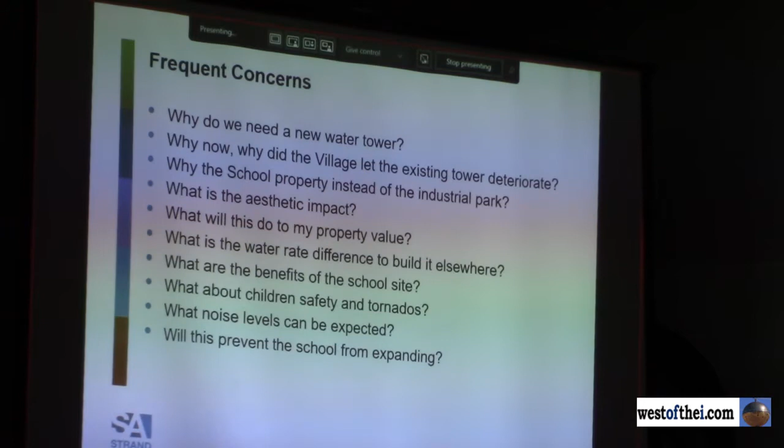First, why does the village need a new water tower? As most folks know from seeing the existing water tower, that needs repair. That's one side of it. Another side of it is that the village's water supply system needs additional fire flow capacity available to it.

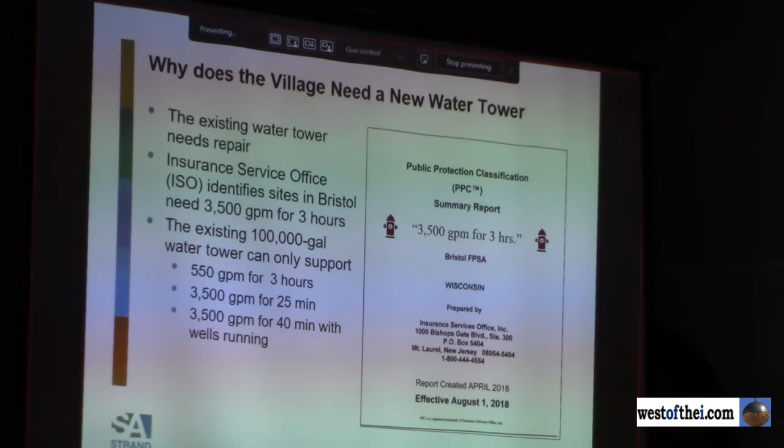I make reference throughout the presentation to ISO, the Insurance Service Office, an organization that goes to communities all across the nation. They test fire hydrants and review water infrastructure to see what the water mains, pumps and towers are capable of providing as far as fire flow goes. They also look at the building occupancy type and construction type to set a target for how much fire protection is needed at this location, and then they do flow tests to see how much is available.

They come through about every 10 years. The last time they came through the village of Bristol was in 2018, and they determined that there are a handful of sites here in the main part of the village, which is utility district number 1, that need a fire flow rate of 3,500 gallons per minute for a total of 3 hours.

The existing water tower is 100,000 gallons, and if you do the math, it cannot support that. Looking at a 3-hour duration, the existing tower could support 550 gallons a minute. If you try to deliver that target flow rate of 3,500 gallons per minute, it could do that for a total of 25 minutes before it would go empty. And with the wells running, it could do that for a total of 40 minutes. So that is a deficiency.

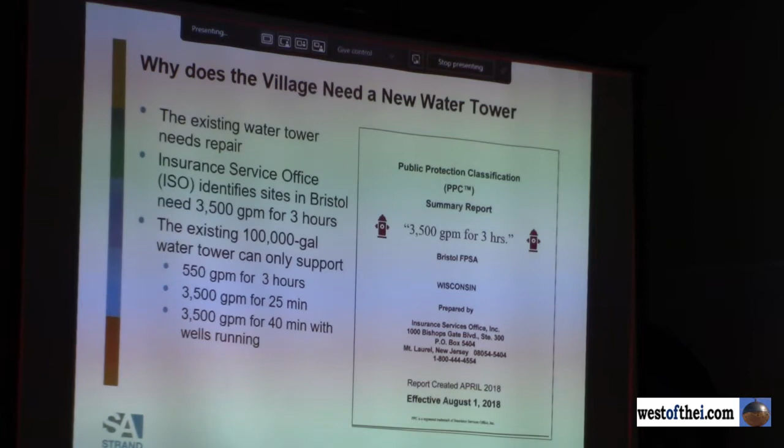That naturally prompts the next question. Why now? Why did the village defer maintenance on the existing water tower? The village has been deferring maintenance for some time. They've known that additional storage is needed, and there's been a plan in place for how a new water tower would be paid for, and it has a lot to do with impact fees from new development as they build in this part of the village. They pay connection or tap fees that help pay off the capital costs for a new water tower.

That plan has been in the works since prior to the 2008 housing recession. The housing market's been down, there's not been as much development, so the village wanted to wait for that development to come around and provide the funding source to do it.

DNR regulates water tower maintenance. Some of the comments have been, why would we build a new water tower? The village is just going to let that one go too. To that I say the DNR regulates water tower maintenance. They come through the village and do what they call a sanitary survey once every 3 years. Their field representative reviews all of the water supply facilities in the village. They monitor these things, and when they believe it's in need of repair, they issue a citation to the village.

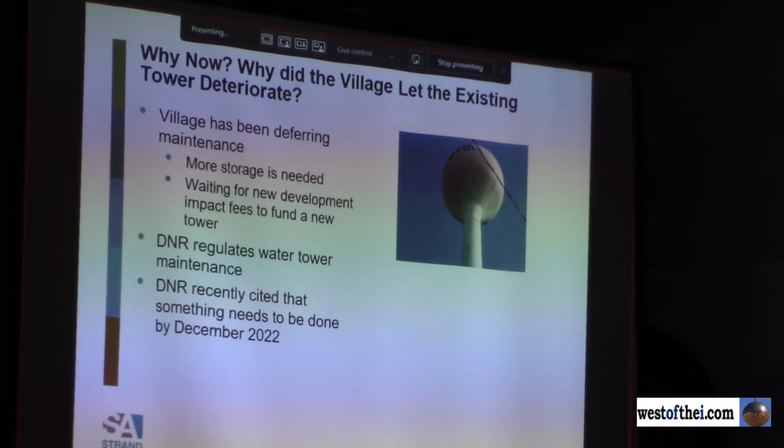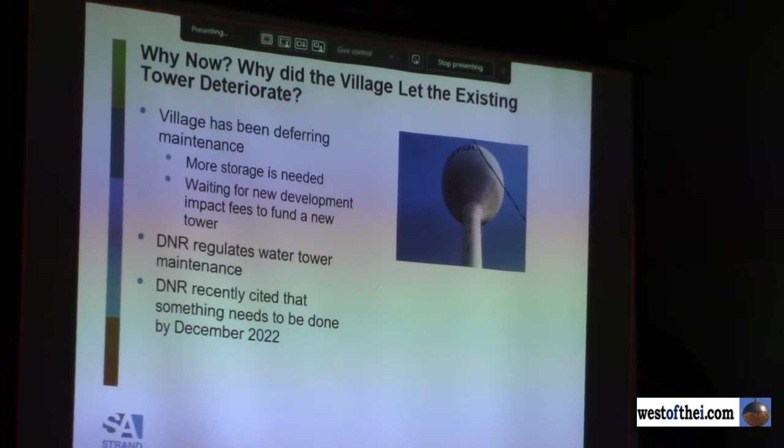So the village was waiting for either the development or the other hand, which happened to fall here in this situation, was that the regulators said, okay, you've deferred it enough, it's time to do something. Now the village has known for a while that, again, there's not enough storage here, and when the village's hand was forced to do something, they would build a new water tower with more capacity.

Hey, Ben, excuse me 1 second. Sure. I think you skipped the scope and function page. Oh, forgive me. Okay, thank you, Mike.

Function and scope of the water tower project. This is just intended to give kind of a baseline understanding of the style of water tower that's proposed here. This style is called a single pedestal because it kind of sits on one peg, so to speak, and it's got a big ball on the top that holds all of the water. So the water tower controls the well pumps and absorbs pressure shocks.

So if you folks are familiar at all with a house that has a private well, for example, there's a pressure tank in the basement. That pressure tank absorbs changes in pressure, and it also serves, there's a high and a low pressure set point. When that tank reaches the low point, the well pump kicks on. When it reaches the high point, the well pump kicks off. Exact same thing happens here, except the pressure tank, really, the shock absorber, is the water tower.

It's open to atmosphere, so that water tower level can rise and fall. As the pumps kick on initially, there's a shock of energy that kind of goes into the system. The water tower helps absorb that. There's a lot that goes to having this storage elevated. It pressurizes the system, which makes sure that there's always, even under an emergency, DNR minimum is 20 psi pressure in all the water mains, and that's to make sure if there was ever a leak in the pipe, water would go out and contamination would not migrate back in.

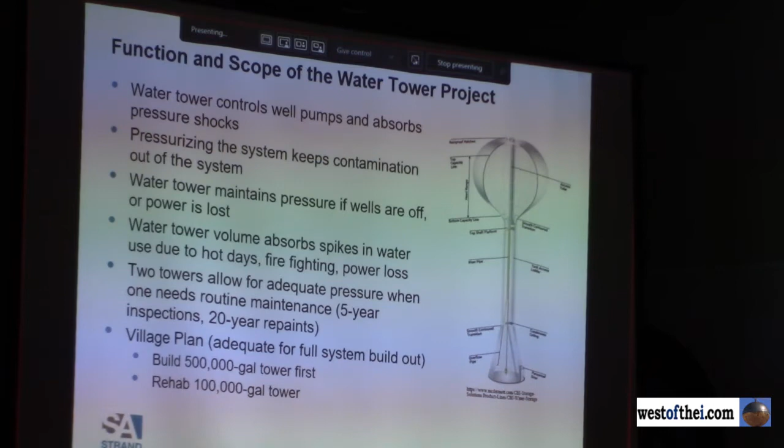All right, did that slide, so just want to double check here. Okay, why the school property instead of the industrial park?

So large diameter mains help move water across the system. Think of this in terms of roads, right? Interstate highways move a large volume of traffic very quickly. One-lane gravel roads, not so much. It's very similar in a water system. 12 and 16-inch mains are considered large transmission mains that are in place to get water in large volumes across the system very quickly, so that when the fire department is fighting a fire, they have that water pressure and volume when they need it.

So the school site already has 16-inch water mains. Those were invested in because the school site was historically planned for a water tower. I know this is probably hard for those to see in the back of the room, but there's a pink line here in the bottom of each of these graphics. That's a 16-inch water main, and it starts on the east end at US 45, and it kind of wraps all around the west side of the village.

And the intent there was that as development continues to happen on the northwestern portion of the village, that transmission main would be expanded, much like a bypass around a city, if we're back to our roadway analogy. And then all the smaller mains are kind of tapped off of that. So having the water tower on this 16-inch main helps move water around the system very, very quickly.

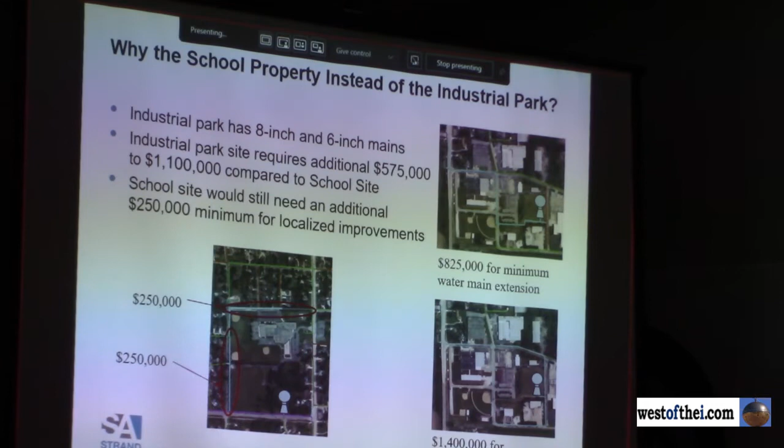So even if the water tower goes in the industrial park and all of the money is spent that we suggested or called for in water main improvements, that in and of itself doesn't fix the fire capacity issue at the school. There would still need to be water main improvements at the school site to improve that situation.

Why weren't the school water mains installed in the past? The current water study that we're doing as part of this design revealed the need for the water main extensions to increase the fire protection at the school. So the reason why we undertook the effort of doing this study now is the water tower is intended to serve the system for full build out, and water towers are often in service for 60 to 80 years, if not longer. So when looking at that kind of a life cycle of a project, now was an appropriate time to do the study.

It was not done at the time of past school additions. So the village typically requires water main extensions. If it's new development, the developer has to pay for the extensions so that they have adequate water supply to their new development. In the case of the school expansions, they were not reviewed with the same level of scrutiny as a new development was, and the water mains were not required to be put in at the time.

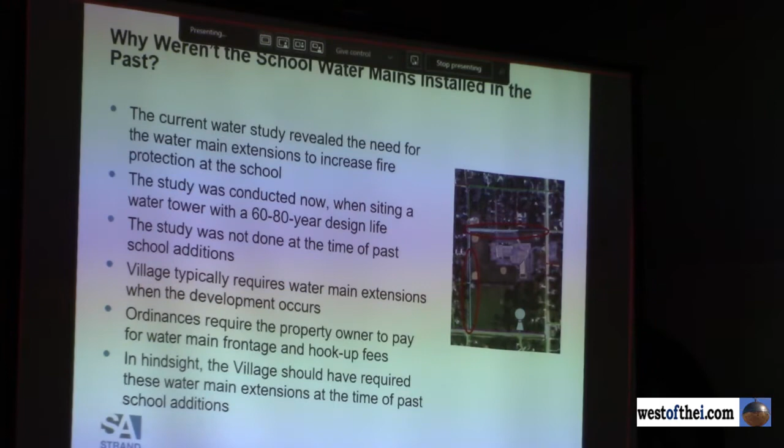Now I will state that ordinances require the property owner to pay for the water main extensions as they traverse that particular property. In hindsight, the village should have required these water main extensions at the time of the past school additions.

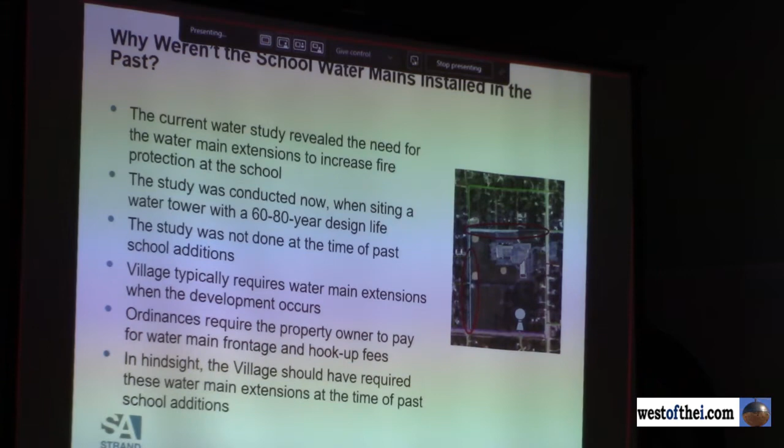Just spelling it out to tie these thoughts together, if the village moves ahead with putting the water tower at the school site, some of those water main improvements that benefit the school would be done as part of the water tower project costs. If the water tower goes in the industrial park and the school district wants to move ahead and improve the fire protection, they'll have to pay for those water main extensions on their own.

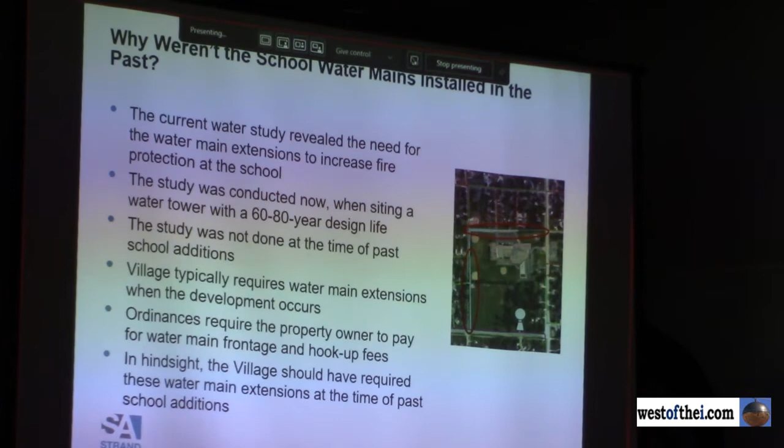What is the aesthetic impact? Of course, this is probably the #1 concern that's been passed along through those of you who have voiced the concern. So I put together a number of renderings. Now, just a couple notes on this. Most trees and landscaping are not shown. This was put together in a software program called InfraWorks, and all it does is it takes a two-dimensional aerial photo and applies it to ground contours and topography, and that's why in some of these images you see a distorted image just based on the perspective of the model.

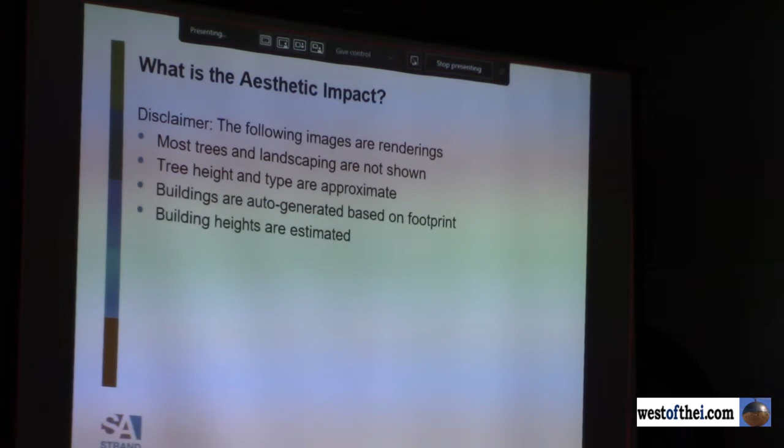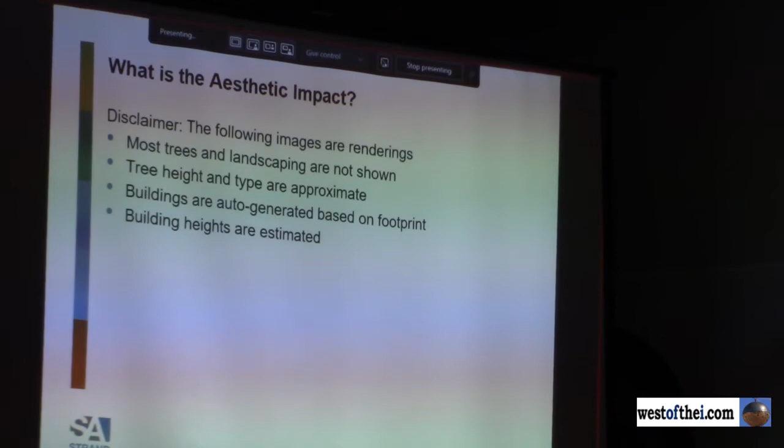So trees and landscaping are manually added, so of course we didn't go through the effort of adding all the trees. Tree height and type are approximate. Buildings are auto-generated based on the footprint of a house, and the heights are estimated as well. So if we have not rendered your particular property correctly, please know it was just to provide a general visualization of what this might look like.

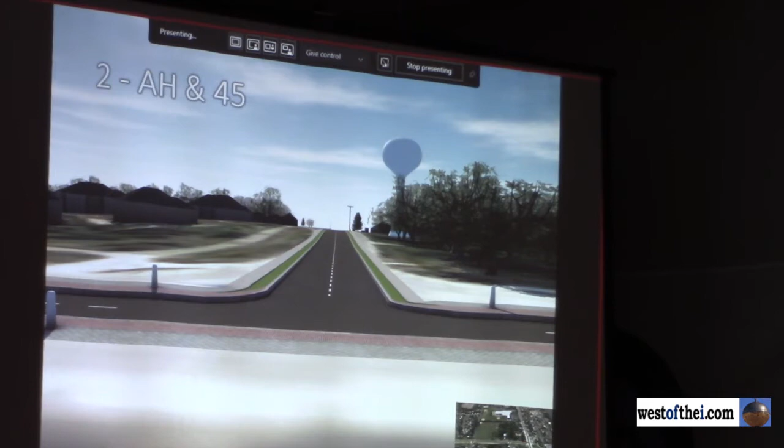Number 2 is on US 45, looking west down AH. Chaucer Woods is on the left, and the school property obviously on the right. And again, I'll just reiterate, every single one of these is on the boards in the back if you want to take a closer look at a location nearest you. You can feel free to take a look.

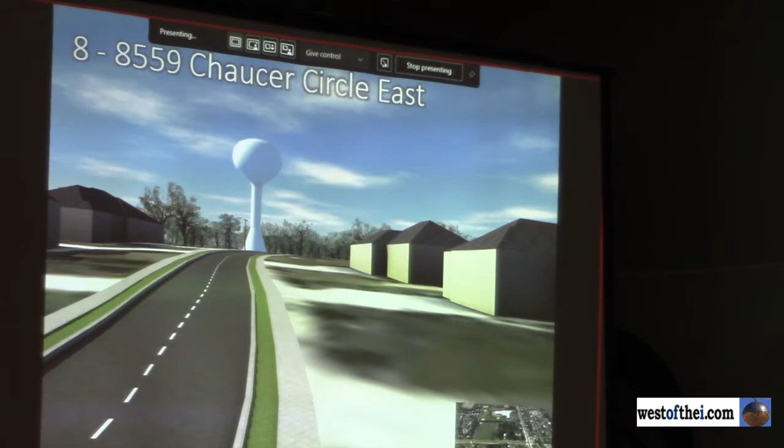Same view, a couple more houses down. The reason I wanted to pick out these views in particular is just obviously as you kind of turn around the horseshoe here, you're going to lose vision of the water tower. So I want to make sure to give an idea for the various folks who are going to have the most direct view of it so you had an understanding of what that would look like.

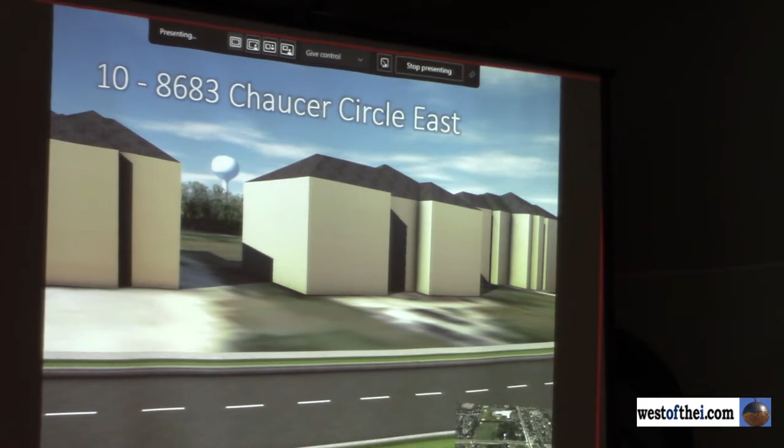We're still at the midpoint in that horseshoe, but kind of in the front yard across the street. Again, these building heights are approximate. They're probably not quite that tall, but the point here is you'll see the water tower kind of between the houses, but if there's a house blocking your particular view, you might not see it.

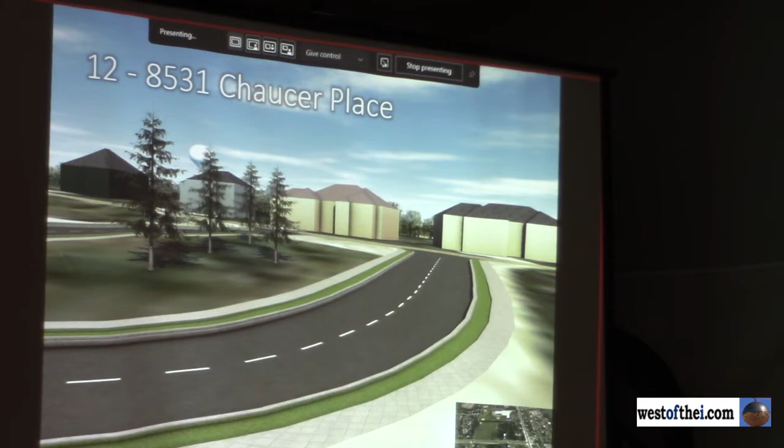As we continue to move around the horn, we're getting toward the west side of the circle here. Again, the point here is that you can notice that the water tower is getting further and further off on the horizon, and depending on your perspective, you may see it around or behind some of the houses, and in some cases you won't see it much at all. This is kind of in Chaucer Place. Again, I know that's not representative of the actual landscaping there, but you can get a feel for what that would look like.

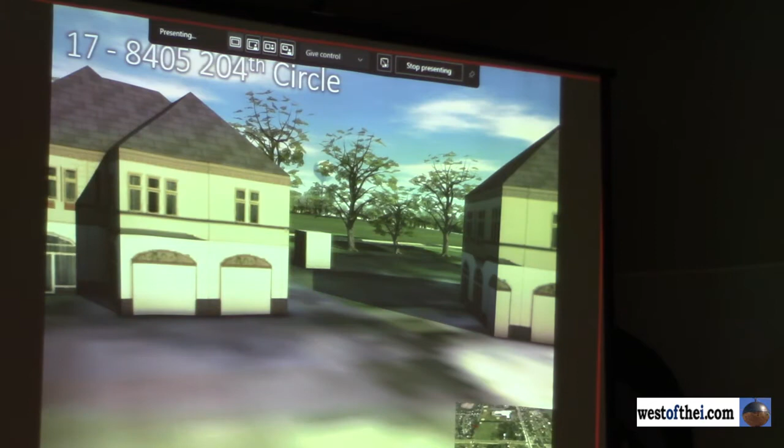This is moving up 204th Circle, a little bit further north. There's another cul-de-sac. This is an idea of what the water tower would look like from that perspective.

And it looks like that was the last one. So Randy, the village administrator, did reach out to an appraiser that the village uses, and it's his quote, so I'm just going to read it verbatim, if you bear with me here, because obviously a big question here is what will the water tower do to my property value?

So Mark's quote here is, "I am not aware of any specific situations or studies in Wisconsin regarding residential values being lowered due to a water tower having been placed in mainly residential development areas. Water towers can be found anywhere in a community, and there are many municipalities in the state that have them in residential areas based on the need to do so. In many of these communities, the water tower serves as a nameplate with the town, village, or city name placed on them to help identify a location, or they bear a local mascot from the school or community.

As a member of the International Association of Assessing Officers, I checked their research library and found only one study from Texas in 2017 regarding the impact of water towers on residential property values. The general conclusion from the report was similar to my observations over the last 17 years, in that properties located near water towers show no discernible difference in value than those not located near one. In some instances, the values increase because properties now had access to water, more pressure, etc."

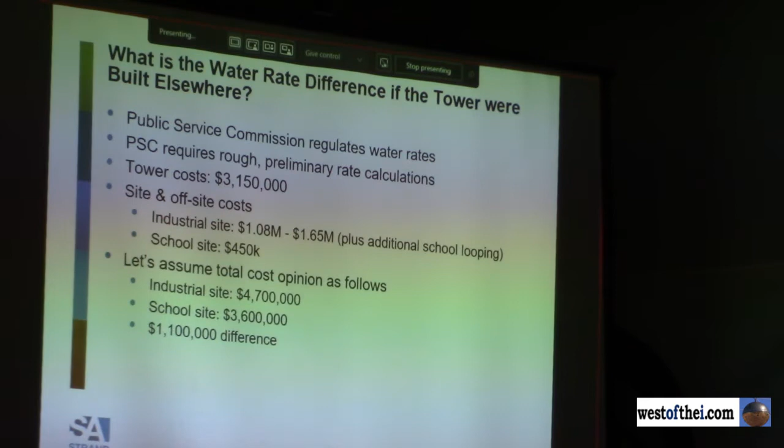So that leads to a total cost opinion for the industrial site of 4.7, the school site 3.6, a difference of about $1.1 million. So what does that mean for rates? So rates should be considered indefinite. Realistically, it could be a 20 to 30 year time frame that'll have to be paid for through the rates to pay off the initial financing.

But the Public Service Commission also requires that the village account for depreciation of the water tower in the water rates. So they make you kind of store up money so that someday when you need to replace that water tower or do a maintenance project on it, that money is kind of built in. So this should really be considered as applicable for the entire life of the water tower. So the current average residence is about $36 per quarter. That would be about 70 gallons per day, 2.5 people per house, leads to about 6,000 gallons per quarter of water use.

The industrial site, plugging in all the numbers, PSC has a little calculator on their website, would lead to a 160% rate increase, so that same water bill would jump up to $93.60 per quarter. For the school site, $1.1 million less capital costs. There's still going to be a hefty rate increase of 122%, but it results in a quarterly water bill for the average residence of just under $80 per quarter.

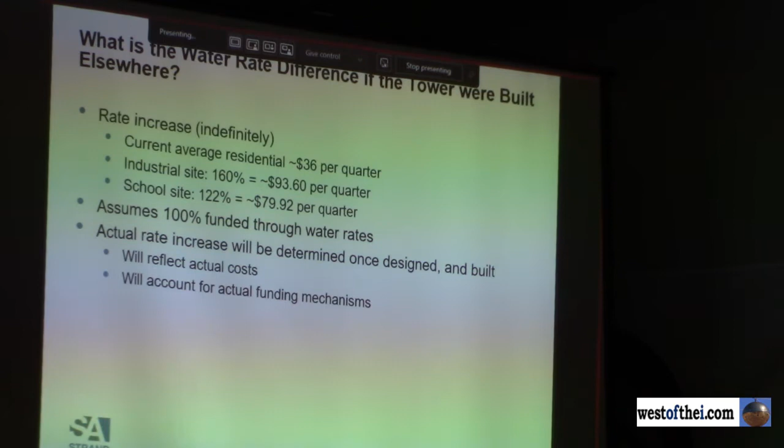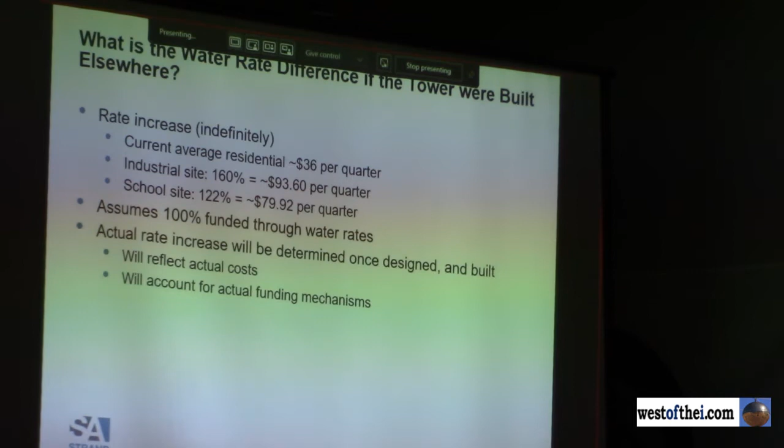And then once the project is completed, the PSC will make the village go through the full-blown calculations, audited calculations. They'll account for all the actual funding mechanisms to determine what the water rate increase will be. But you can get an idea for the order of magnitude difference between the two sites.

What are some of the other benefits of the school site? The school is a customer of the Bristol water utility, and their fire flow capacity is below ISO target levels. That's kind of the problem here. That gets solved for the school in part by siting the water tower on that property. School site utilizes the benefit of past investment in large diameter mains. What I'm meaning there is the village already started building this backbone on AH of 16-inch diameter mains. Putting the water tower on that backbone just makes good use of that past investment.

Siting the tower at the school saves the utility and the school money. Using those existing mains, it expands mains further to the school as part of the project cost rather than having to, if the school wanted to take that on as a special assessment or some other charge, and it keeps the water rate increase lower. Now again, there's going to be a significant rate increase as the result of this project, but it controls that a little bit.

Another question that came up is, well, won't a sprinkler system at the school kind of take care of the fire protection problem? So one issue with that is building sprinkler systems are usually fed with a private lateral that's 4 inches in diameter, some cases 6 inches in diameter, and there's only a 6-inch pipe available to the school right now. And tapping a 4 or 6-inch pipe off of a 6-inch water main, there's just not as much volume and pressure available to that private fire lateral to serve that sprinkler system.

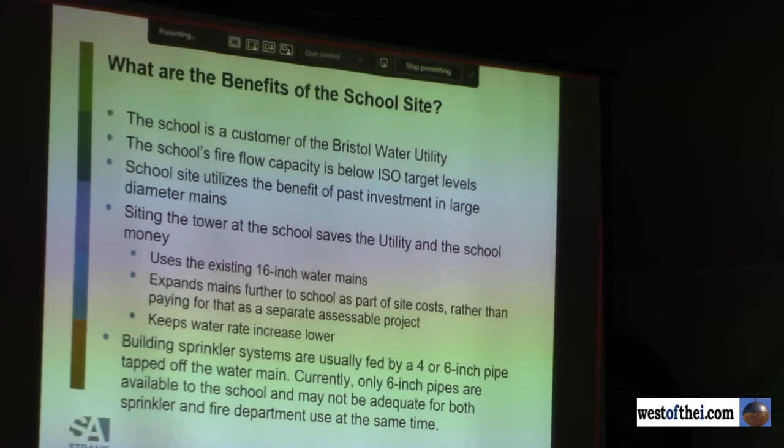Particularly if you think about it in terms of if there is a fire at the school, the sprinkler system and the fire department are going to be competing for that same water out of that 6-inch main. So I have no idea what flow rate, for example, the sprinkler system is designed for, but let's say the fire department already wants 3,500 gallons per minute to fight the fire, and there's only 1,900 gallons per minute available, but it's only available at 20 psi under worst case scenario. If the sprinkler system needs a few hundred gallons per minute of that, then that's even less that's available to the fire department to fight the fire. So having a large diameter main there just helps out both the fire department and the sprinkler system.

The water tower itself has no moving parts. It literally has a 12-inch water main that goes 100 feet up in the air to the big bowl where the water is stored, and it's the well pumps that are off-site that control the level in that water tower. So there's no pumps or moving parts here, no associated noise.

Let's see here, ladders. Any ladders with this type, they're all internal. So that big diameter pedestal is part of the structure. It doesn't actually hold water. Inside that pedestal there's ladders, there's platforms, and there's a 12-inch pipe inside that takes the water up to the bowl. So the only way to access those ladders is through a steel door on the outside of the bottom of that pedestal, which is under lock and key, and those also have an alarm that's tied back into a central computer monitoring system.

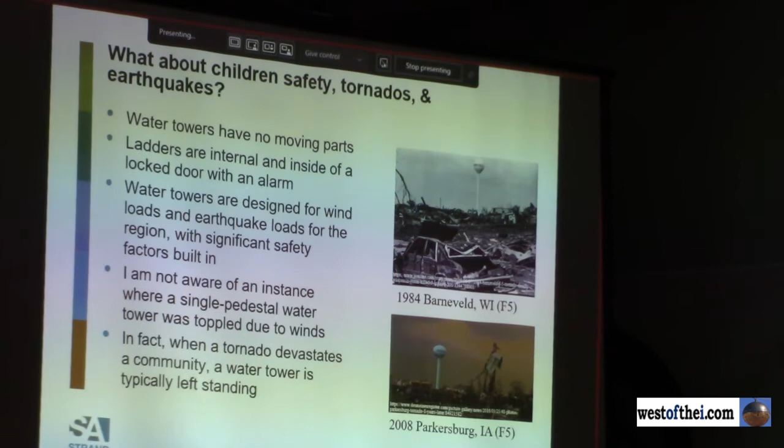And I'll just leave it at our earthquake factors: design factors are taken into account just like there are for high winds and tornadoes. Fire protection is the real safety issue. So ISO, and I know I've been going through this a lot, but just to reiterate one more time, ISO indicates that the school should have 5,000 gallons per minute for 3 hours available. We're targeting 3,500 gallons per minute or more for 3 hours.

The existing 6-inch mains on the north side of the school only supply 1,900 gallons per minute when the system pressure is allowed to drop to DNR minimum 20 psi. The sprinkler system and fire department will be competing for the same limited water supply. Bristol's fire chief was consulted and concurs with the need for the new 500,000 gallon water tower. A new water tower on school property, along with new large diameter water main on 203rd Avenue, provide over 4,000 gallons per minute of fire protection to the school. Relaying 6-inch water mains near the school parking lot on 83rd Street are also recommended.

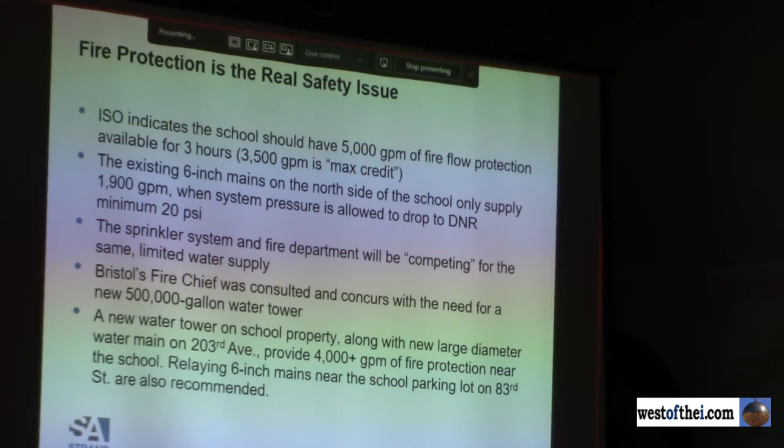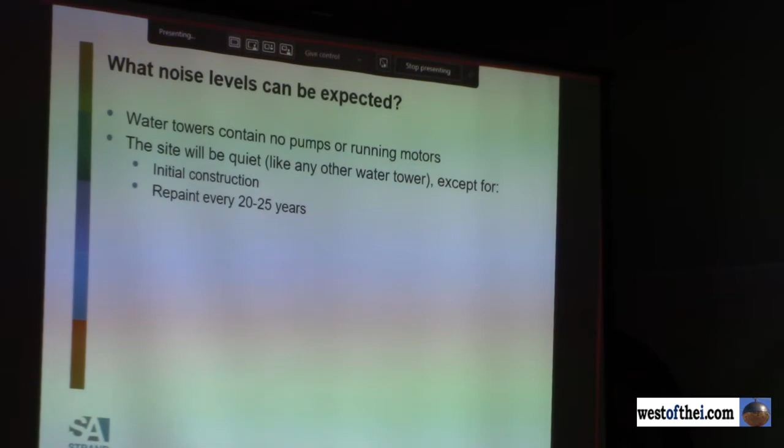What noise levels can be expected? Again, the water tower contains no pumps or moving parts. The site will be quiet like any other water tower except for initial construction. It's going to be rather disruptive with cranes, excavation; foundation systems are commonly 25 or more feet deep. And then water towers these days get repainted approximately every 20 to 25 years, and that's about a 2.5 to 3 month process. So those are the times that the site will be noisy, but in between and under normal operation, it'll be a pretty calm, quiet site.

Will this prevent the school from expanding? So just in full disclosure, I have not talked directly with the school at all about this. We've been relying on the village to be an intermediary there. So I have no knowledge of their plans for expansion, but I just laid out a couple quick graphics here to give a perspective of what might be possible.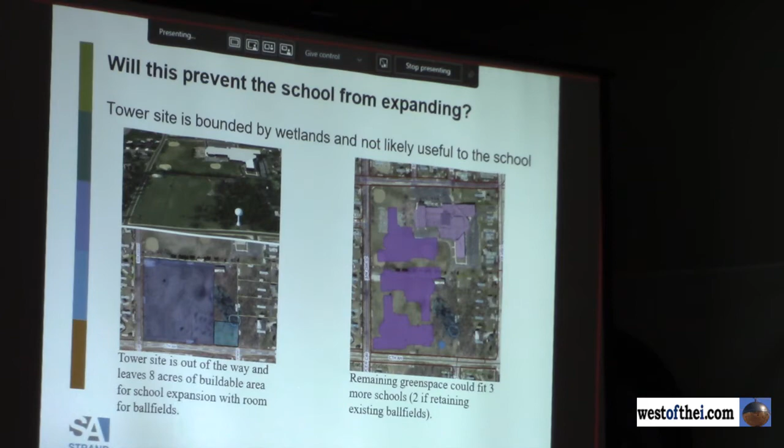Go ahead, Trustee McKay. You talk about the old water tower just needing a coat of paint. Is there more involved than just slapping a coat of paint on the outside of that? Yep, so while I've not actually been hands-on to inspect it, on the outside it needs a full sandblast down to bare metal and to be repainted. And that again is about a 2 or 3 month process that the water tower would be out of service.

And then at the same time, while the water tower is drained out, we would highly recommend a contractor go in and do the same thing on the interior, sandblast it down to bare metal. Now the existing tower, my understanding is it's over 60 years old, so there are some code issues on the tank as far as adding a safety railing to the outside of the tank, adding a fail-safe and tamper-proof vent to the top of the tank, and then upgrading the ladders and fall protection equipment on the inside of the pedestal.

Any other questions or comments? A couple. Where would that put our water rate statewide? Statewide, it would be near the top. I don't have the exact figure, but I think you could safely say within kind of the top 10th percentile. It wouldn't be the most expensive, but it would be up there.

I also want to state, just so everyone knows, whether this project moves forward or not, it's what's known in the industry as the replacement era, right? So a lot of these water mains, a lot of this development happened during the 40s, 50s, 60s, all kind of related to the war era. A lot of ductile iron pipes that are failing and need to be replaced, et cetera. So the point I'm making, Bristol, like a lot of other utilities in Wisconsin, is at a point where a lot of these systems are reaching the end of their useful life and will need to be replaced.